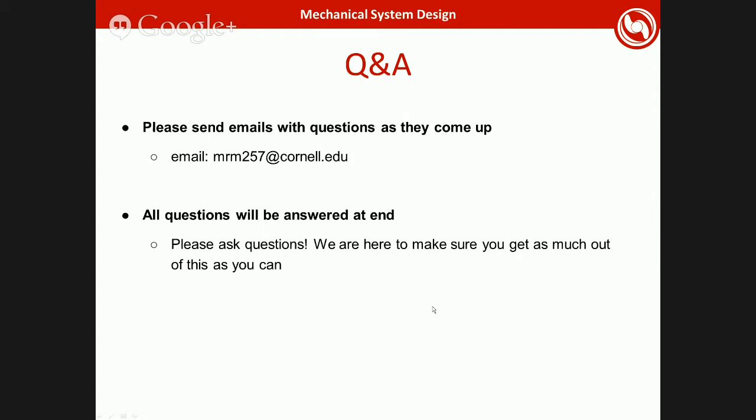All right, so first, just looking at design cycle options. So we've noticed a few different ways of doing this, and our team has done complete designs in different ways. So the first is sort of a multi-year phasic redesign, and there's a good portion of teams at the RoboSub competition that tend to do this, and so it basically involves just adding new projects each year rather than doing a complete vehicle redesign. And so that is very useful because you can keep what worked, as well as being able to implement new projects in a little less risky manner.

If you redesign the whole vehicle each year, it's more risky. It's also easier on resources, shorter design cycle, because you don't have to worry about integrating every single vehicle component together. Yeah, and then our team does an annual complete vehicle redesign. So that's a 12-month cycle. And it's good for training new members. We like to put all of our new members, our freshmen and sophomores, on completely mission-critical projects every year.

And then by the time that they're done with their fourth year, they've done 4 different projects. And they've pretty much gotten a sample of everywhere on the vehicle. It keeps knowledge of each sub-team very current, as in basically we move people around. And as you go through, everyone sort of learns everything about every sub-team every year. And then, like I said, by the time your fourth year is over, you've got all that necessary knowledge to be a team leader.

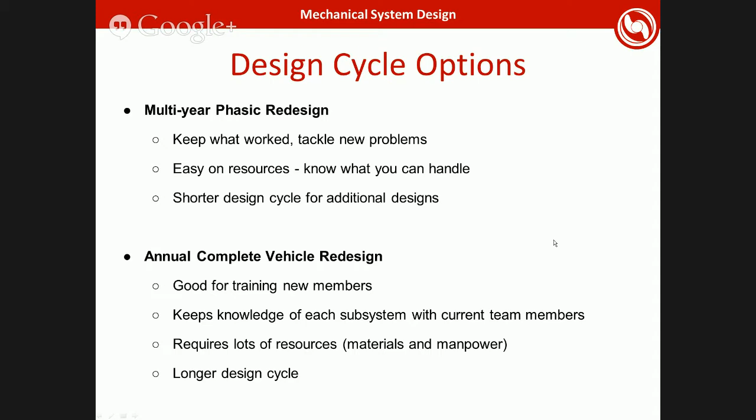Cool. So these are some different design objectives that we focus on as a team, and it's also important to look at the order of importance of these objectives, because sometimes we found that it's easy to get bogged down on things that might seem more interesting at the time, but in the end are not necessarily the most important objectives mechanically for the team. So we sort of laid out what we thought would be roughly the order of importance of what needs to be mastered in order to move on to the next level of focusing on different objectives.

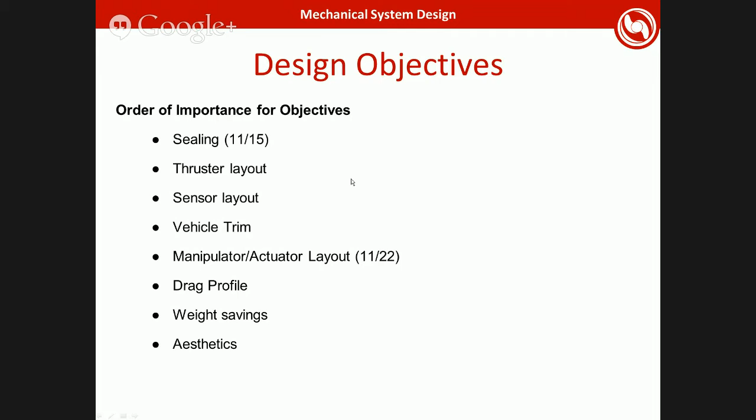So a little background about what we do on the team. Again, there are 3 groups that we have on the mechanical team: structures, actuators, and enclosure and main hull. And like I said, we have a 12-month design cycle. So that goes everywhere from concept and brainstorming in August, where we go over virtual discussions and weekly video chats for brainstorming, to design, modeling, and simulation in September and October.

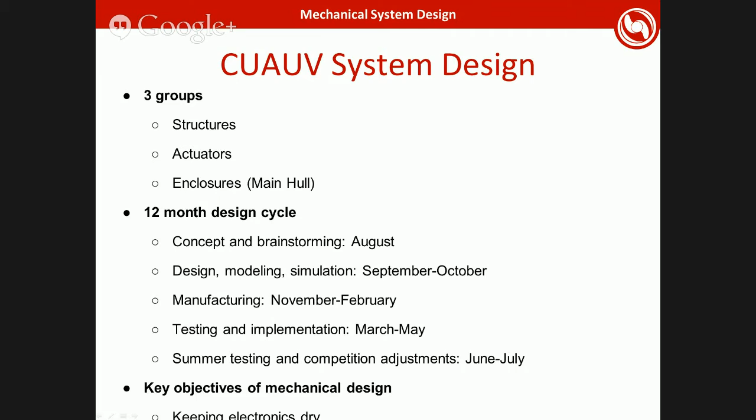So basically when we get back to school, we'll start looking at designs and going through all of our design reviews with one another. And we have that on a 3 design review schedule. So we do preliminary design review and then a mid-level design review where we go over some of the things that have changed since PDR, MDR, and FDR we call them. And then by the time FDR comes around, final design review, we should be basically done, and then we lock the designs and start to move them into manufacturing, which is our November to February.

We have a machine shop here, and we'll go up to the machine shop and we all manufacture our stuff ourselves. And then starting March to May, we put the whole vehicle together, put it in the water, and then do testing and implementation with the software team and the electrical team and make sure everything's working right. And then, of course, there's summer testing, which is everything before the actual competition. And that's pretty critical because we get about 8 or 9 hours a day of testing in that.

Of course, key objectives: keeping electronics dry. That's the sealing part. That's priority number 1. Optimizing ability to control the vehicle. That's thruster layout, sensor layout. Creating reliable task manipulators, again, the manipulation actuator, and learning and improving manufacturing techniques. And that kind of goes in with every year having to redesign and then go and manufacture everything yourself. We get a lot of experience in trying to figure out the best manufacturing techniques available to us.

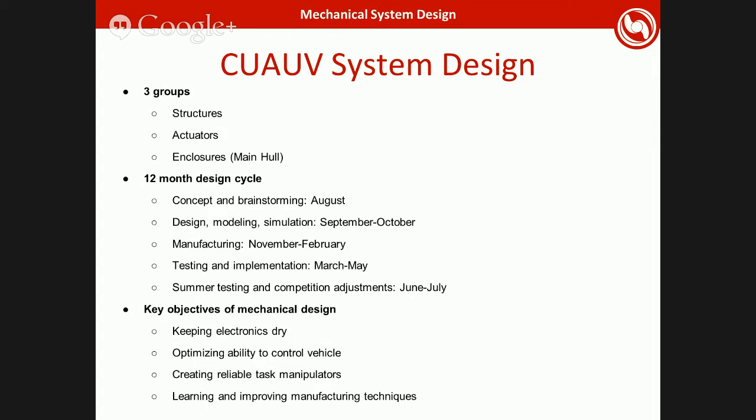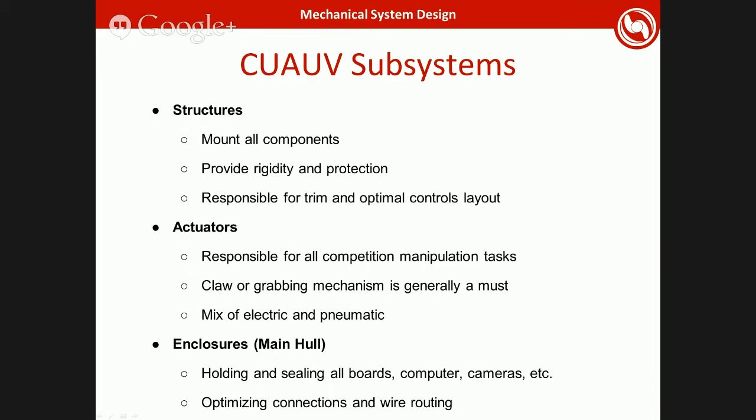All right. So looking at the systems on the vehicle. So we split our mechanical team up. We have anywhere between 10 and 15 members of the mechanical team each year, and we split ourselves up into 3 different sub-teams working on these 3 different subsystems. So the first would be structures. And below are just the simple requirements or objectives for each sub-team.

So structures builds anything that enables us to mount all the different components onto the vehicle, to provide rigidity and protection for key parts such as our Doppler velocity log, and is responsible for trim and optimal controls layout. So basically the structures team is responsible for building the frame and any external enclosures for holding different vehicle components, allowing for accessible mounting, optimizing the layout, the overall drag profile of the vehicle. So it's mostly frame and enclosures that are involved on that subsystem.

Actuators, so that's what it sounds like. We have a mix of electrical and pneumatic actuators depending on the task. The sub-team is responsible for creating either the claws or wheel turn or whatever it may be for completing the competition manipulation tasks. And so traditionally we've done a valve enclosure and some sort of grabber, multiple grabbers, and then some sort of servo motor manipulator as well. And the thrusters are also part of the actuators team.

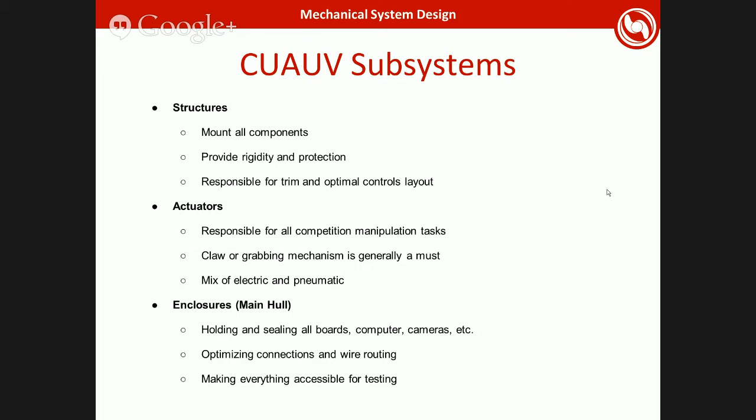All right, so we're going to be going through each of these three subsystems and outlining some different ideas for how they can be done, different ways that our team has done them and we've seen other teams do them, just to throw ideas out there if you're looking for different ideas, and we'll give our opinions on them. Of course, this is just what we've noticed. More research is always better in investigating these different designs.

Next would be something like 80-20, which is also pretty customizable. You can add brackets where you please. If you haven't worked with 80-20, it's pretty easy stuff to customize to fit all of your different needs for mounting. However, it can be expensive, also pretty heavy, but overall it's a lot more rigid and structurally sound than PVC would be.

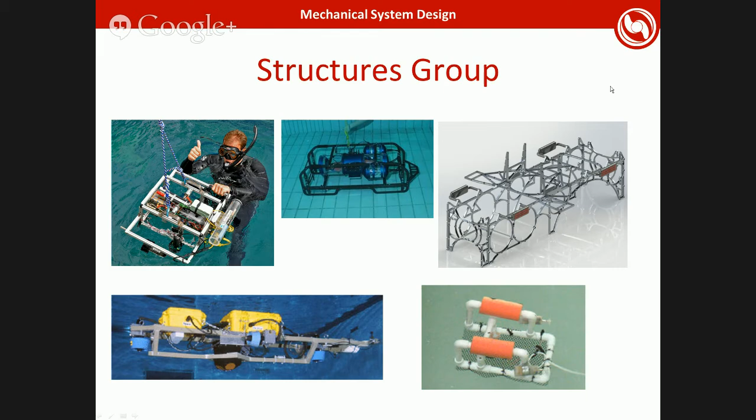These are just a couple of other things that we do on the structures team. We have battery pods, which you can see in the upper left. The reason we make these into separate enclosures is so that they can be hot swappable. We generally have built 3 sets of 2 packs each, so that you can always have one plugged into the vehicle when you're replacing packs. Then you just replace one at a time. So basically the vehicle doesn't ever have to turn off, and you can move on quickly with testing.

So we'll generally have 3 of these packs so that we can always keep packs charging, and the vehicle can basically constantly run. It's slower charging one set than it is using a set on the vehicle. So that's why we have 3 sets.

The bottom is a hydrophones enclosure, and that includes all of the electronics boards for our hydrophone system, as well as the elements, which are the three cylinders poking out on the side there. We've put this away from the main hull of the vehicle mainly because of noise reasons with the actual boards for the hydrophones tasks. And we want the elements to be placed in an optimal location for the least amount of interference. So that's why we've created a separate enclosure for that. The kill switch electronics are also separate from the main hull, so it can be as accessible as possible.

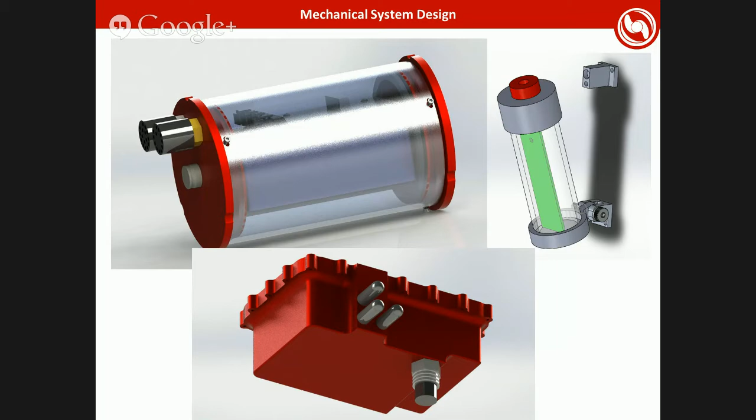So first, talking about thrusters, we've used a different number of thrusters throughout the years. And in competition, if you walk around, you can see many different thruster layouts, and actual numbers of thrusters on the vehicles vary a lot as well. So as we were thinking through this, we went through what we would see as ideal or recommended for a different number of thrusters that you have available to you, because we know these can be expensive, resource-wise, electronics-wise and battery-wise. There's a lot of different constraints that control how many thrusters you're actually able to put on your vehicle.

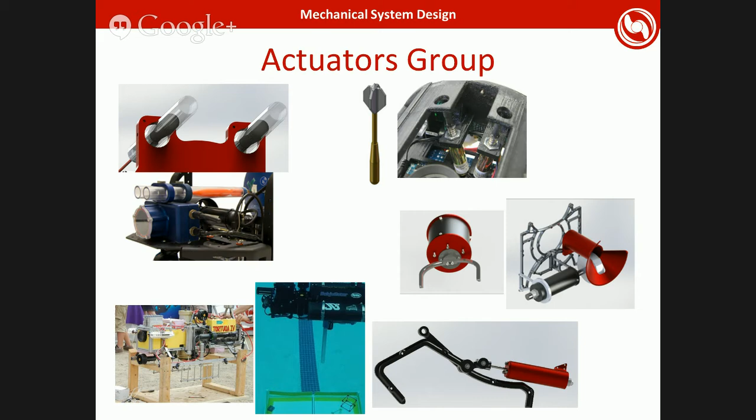The other really cool subsystem is enclosures, or the main hull. So the main hull pretty much does a lot for the vehicle. It's our main electronics enclosure, and that goes in part with sealing. You don't want that to flood. But there's a couple different options that you can look into for your main hull. So you can basically figure out the number of hulls that you want, and also how many sensors you want to combine into your main hull.

You can also put everything into one hull, like we and also Sonia do, where you would have both your racks, so different off-the-shelf components and also custom electronics, in the same hull. And then you can also have your DVL in the same hull. Something that does for us is we can reduce the number of external enclosures on the vehicle by having the DVL inside the main hull. That also allows us to put the DVL and everything closer to the ground, which gives us a little more passive roll control versus active roll control.

And then you also saw Mälardalen University. They have a really cool two-hull design where they separate all their electronics components into two different hulls, and then they interface the two together.

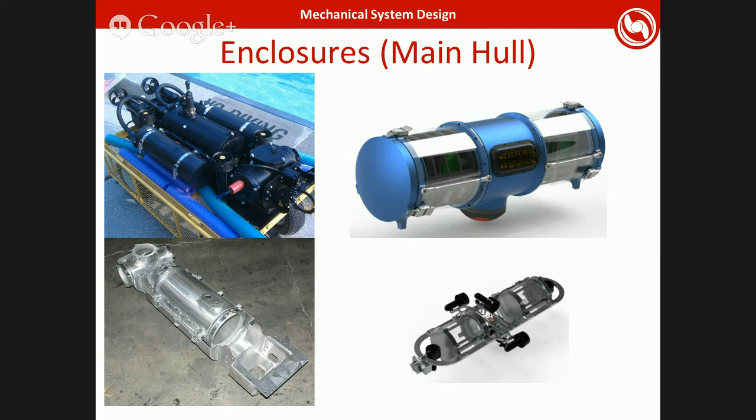So just looking at our hull design again, what we do is we put all of our custom electronics in one side of the rack or one side of the hull, and that's a hinging rack so that we can have the electronic engineers go through and actually mess with that stuff as they need to. And then we put the more off-the-shelf components that we don't think we're going to need to touch very often in the other side, at the fore rack.

And what that does is it allows us to get into the certain parts that we need to and only unseal parts that we need to when we need to. So, for instance, the forward rack shouldn't have to be adjusted very often. So all we have to do is unseal the rear hull, and then we can get into the custom electronics. That just allows fewer points of failure later on when we're looking at sealing as the main priority.

One cool thing that we also do is a vacuum assisted hull. We usually have a little 1/4 inch MPT in the back where we just have a little valve, and we'll pull a vacuum inside the hull, and we have a pressure sensor inside the hull. That way, if the pressure ever starts increasing after we pull a vacuum, then we know that we might be losing our integrity of sealing. If the pressure starts increasing, that's a sign that we're probably taking on water, so we would want to take the vehicle out as soon as possible.

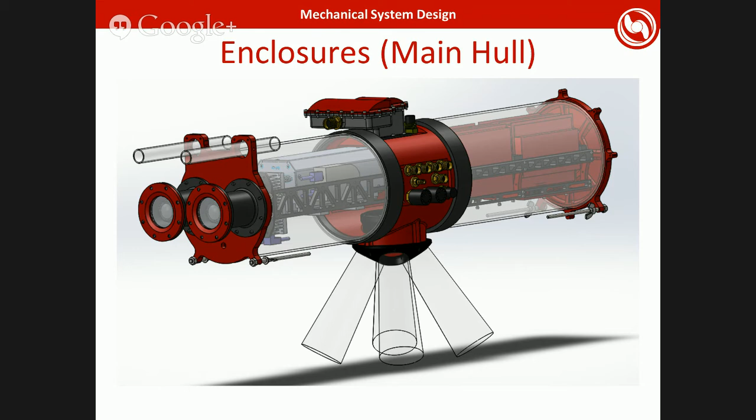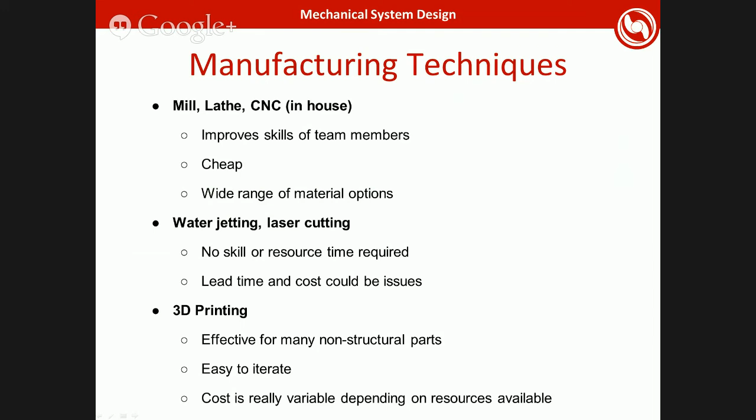All right, so finally we have just an overview of some different manufacturing techniques that we've used over the years and that we've seen. So starting off, our team does most of our manufacturing in-house, and we've had a bit of success with that. We also fail numerous times building each enclosure, which helps us to become, I guess, better machinists. We know that not all schools have mill, lathe, CNC use in-house or training available.

So some different options that we found too are water jetting and laser cutting. So those are options where you're able to have 2D profiles. Actually, this year with our frame, we're going to be moving to water jet instead of CNC just to decrease the manufacturing time on it. And we're not actually seeing significant enough weight savings using the CNC for it to be necessarily worth it in that regard.

So 3D printing is another aspect that we've seen to be pretty useful for creating non-structural parts. Also, it's been great for us for parts that have maybe more complex designs that we don't want to just create out of aluminum right away. We'd rather 3D print one and then test it, print another one, test it again, print another one.

3D printing can be great for that because it's generally pretty fast, depending on where you're getting it done, and not too expensive. So you can get a pretty fast turnaround time rather than getting some sort of really expensive metal part made instead. So we found that to be pretty useful for non-structural parts.

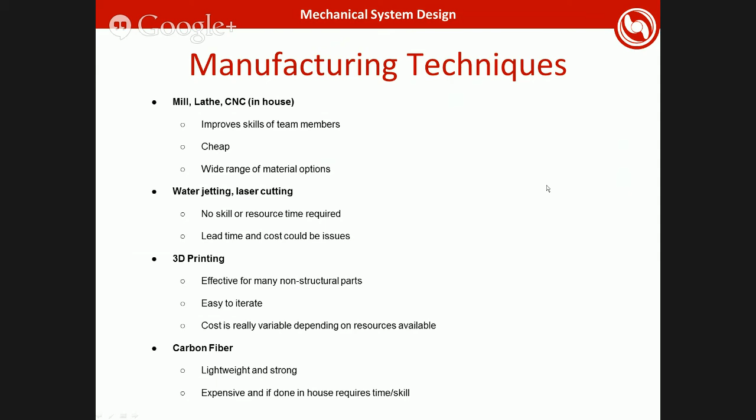We do have a few questions already. So one from Moon-Young Lee: You have recommended a minimum of 4 thrusters on AUVs. How do you go about determining the best configuration, position, or orientation of these thrusters to best ensure stable vehicle movement with minimal software support?

We have seen more value in having it on port and starboard, so if you don't have any strafing capabilities, you're able to turn the vehicle by going reverse with the port and forward with the starboard thruster, which is a good option for being able to turn the vehicle. If you have thrusters on the top and bottom, you'll have increased pitch, but that's not as valuable when you have two thrusters on the fore and aft of the vehicle for controlling your pitch and depth anyway.